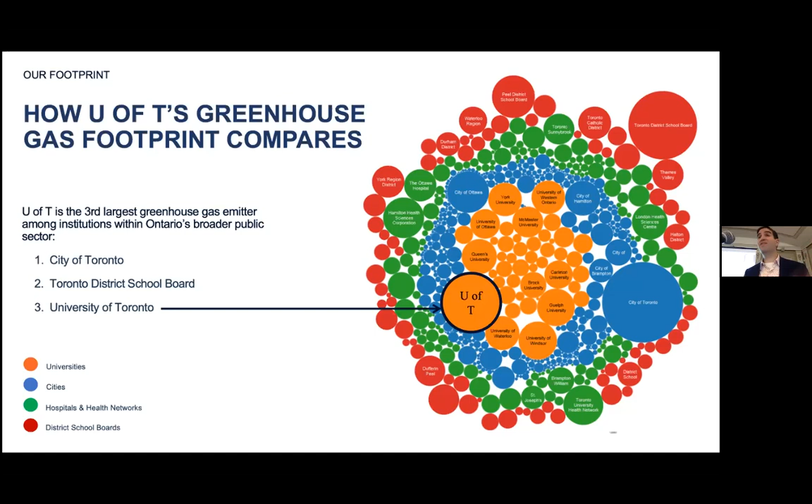I can tell you we have thousands of them across our campus. So that drives our carbon emissions up. And even when you start to compare us to the private sector, in fact, we have more carbon emissions, and this is going back to 2019 before we launched our strategies, than Pearson Airport, more carbon emission than automotive manufacturing.

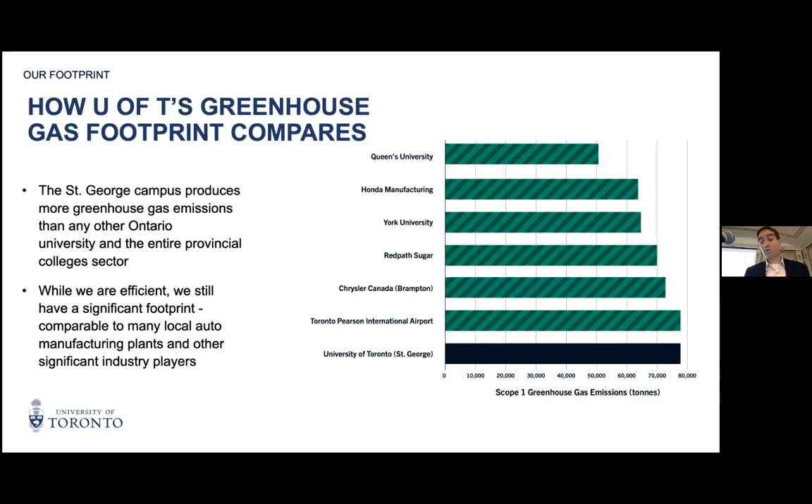So when you think of higher education, you don't really think of carbon emissions or anything of that nature, but there is a reality that we have that, and we have similar problems to these other industries. And for us, especially for myself and my colleague Mark that I'll introduce later, this is a call to action for us and an understanding that this is a problem that we need to tackle and one that we're committed to as an institution.

So that led us to release the low carbon action plan initially, and it's sort of based on this framework that still holds true today. And it's the reality that we produce energy, we distribute energy, and then ultimately we consume energy. And we sort of thought of the process this way and challenged ourselves to say, well, how do we produce as clean as possible? And where we can't, can we do things around carbon capture?

Then once we produce that energy, and in fact, we produce it just 3 doors down at our central utility plant, how do we distribute it to the over 200 buildings that we have on campus and do that distribution as efficiently as possible? Anything you lose in that process is just pure waste. And then lastly, although one would argue most importantly, how do you actually reduce the consumption itself?

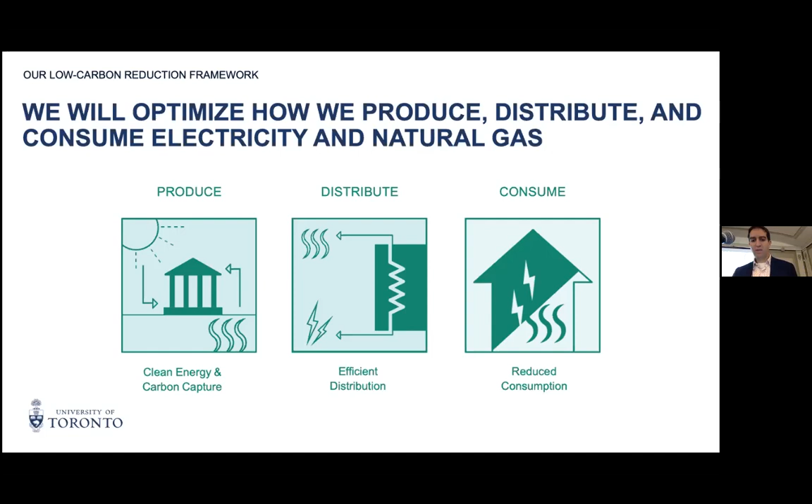And with this framework in mind, we came up with 4 different principles. And the first principle is a reduction first principle, and it's just quite simply, the cleanest and cheapest energy is the one that we don't consume. So how do we reduce our consumption on campus and hence then take that all the way up that sort of framework or value chain I presented to reduce our emissions on the production side?

Secondly, is this idea of balancing carbon versus cost. And I'll dive into this in a bit more detail, but just to kick it off, there's a realization that in Ontario, and this is data from the last 12 months, electricity is about 5 times cleaner than natural gas on an equivalent energy basis. And you can kind of see the carbon intensity per equivalent kilowatt hour for electricity and natural gas. But that same unit of energy is about 10 times more expensive in electricity than natural gas.

You have this reverse incentive. Electricity is 5 times cleaner. And in fact, if we just flip that on its head, we can make an 80% reduction if we electrified everything. At the same time, 10 times more expensive, that would be an impact to the institution of over $180 million a year. Not financially achievable.

So we end up with this challenge of how do you balance these two things? And I don't position this as an excuse. This isn't a reason why you don't do it. This is just a factor that we need to overcome in the design of our solutions.

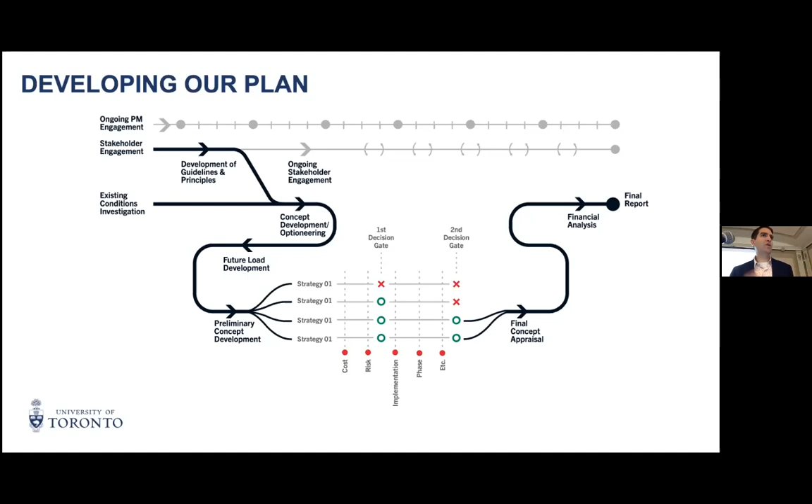And in essence, we start off with figuring out those principles and then starting to look at what are our existing conditions? We have a massive infrastructure system. I'll show you some photos in a moment. And we started to then say, based on that, what concepts can we develop to get to this climate positive future? And then we started to look at what are future loads, meaning as we build new buildings, we'll need more energy. So how do we then also not just meet our current needs, but meet those future needs? And we came up with multiple different strategies. And we started running them through different gates to finally get to what we selected.

And so the three front runners that we studied in great detail are one, what we call central generation. It's what we have today, a central plant there in the red on the left. And then that distributes to the 200 buildings. We came up with what we called a nodal generation strategy. So we've got such a massive campus. Does it make sense to do it all in one place, or can we be more efficient if we do it in 4 places? Or do we just abandon the idea of district energy? Does it make sense in the future to just have every building stand on its own?

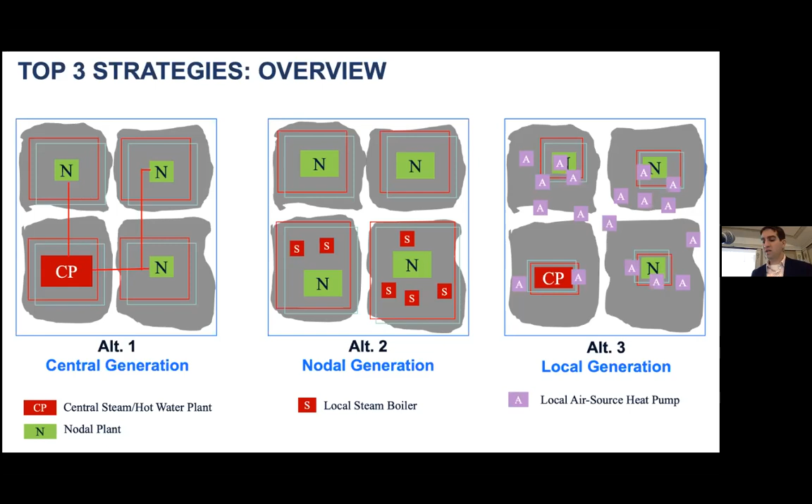Now, we used a multi-factor evaluation matrix for this. We looked at the environmental impacts, primarily focused on carbon in this case, but also looking at implementation and aspects of the environmental impact, digging up roads, things of that nature. Resiliency was a key component for us. And you'll hear me talk about this in a bit more detail in the coming slides, but with the climate change that we're experiencing, we recognize that that's likely to lead to more adverse climate events. So what components of our infrastructure do we need to increase resiliency so that we can maintain the operations, or at the very least maintain the critical components of our operations? People who live on our campus, the research that needs that energy to be constant, and so on.

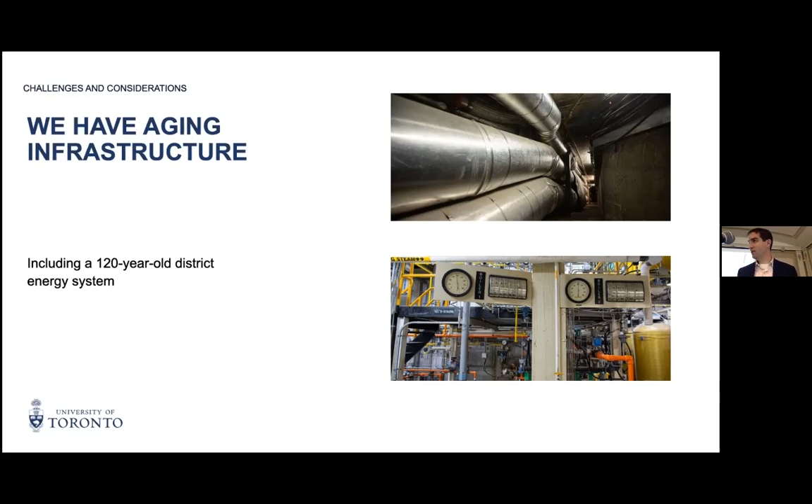So at the end of the day, it boils down to these three goals. First of which is the responsible management of our growth. And we've got tactics underneath each one of these I'll share with you. Second of which is renewing our aged utility infrastructure. Thank you. And the last is a concept around making sure that we have a resilient strategy.

So on the growth, what we did, I want to say 2 summers ago, is we implemented a policy of the institution where we now have an energy and a carbon budget per project. So when a project goes through our governance for approval, they get approval financially. There's also an approval for how much energy they're allowed to use as a firm cap and how much carbon they're allowed to generate as a firm cap. That helps us from a carbon accounting perspective.

So now we can project forward what buildings are coming, how much energy they're going to use. That helps our utilities folks to make sure we have power there, and how much carbon they're going to consume. And that helps us make sure that graph is correct. And that's a firm cap, and every project that's been approved since that policy came in has met that. And so now when we say things are on budget, that means they're on budget financially, but also on budget from a carbon perspective. Our intent is to also extend our district energy system to all of our buildings.

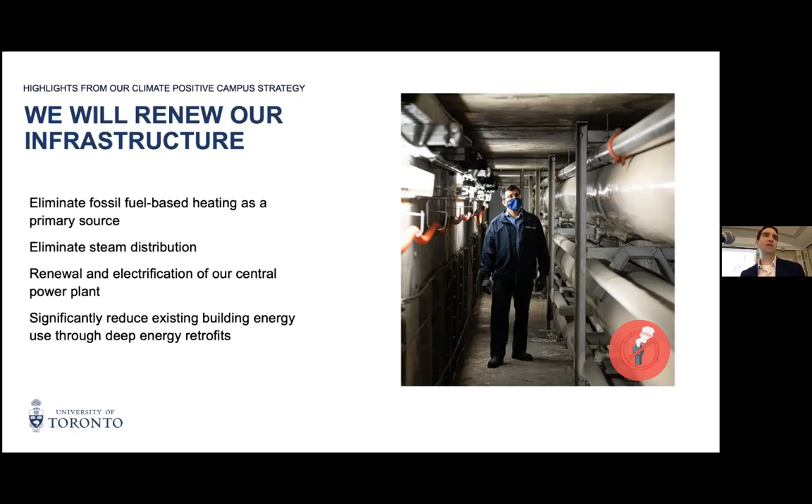We're going to double the size of campus. I can double the central utility plant. That obviously has knock-on impacts to our carbon. Or we can reduce demand in all of our existing buildings and use that capacity to service our new buildings. And that's how we can do an absolute plan where we don't necessarily need to double our carbon emissions as a result. So that last point is just a more succinct way of saying that we're going to do deep energy retrofits to reduce that demand so we can then take that excess capacity it generates to support new buildings.

And the last concept here has to do with resiliency. I always like to illustrate this example because I'm talking about eliminating fossil fuels, and where we are in the city, that means electrification. So we're going to put in electric heating sources. You can also imagine in the downtown core, where Toronto Hydro has probably its oldest assets, we experience quite a few blackouts. And so my nightmare situation is February on a Saturday at 2 a.m., because it always happens Saturday at 2 a.m. We have a blackout, and we're relying on that electricity to heat the buildings that are servicing our research, our students and residents, Vivarium, CL3 labs, all these critical assets. In that situation, the outcomes can be quite disastrous.

So we're working with Toronto Hydro to actually diversify the electrical feeds that are coming in. Today, we have one feed that does 80% of our campus. Our plan looks to bring in 3 feeds from 3 different substations. And we're so fortunate that we are in a part of the city where if you just go 1 block east, it's a different feed from Hydro One, what used to be Ontario Hydro, that comes in from the east of the city. And the other feed comes in from the west. So we are diversifying that electrical input, not just at the Toronto Hydro level, but at the Hydro One level.

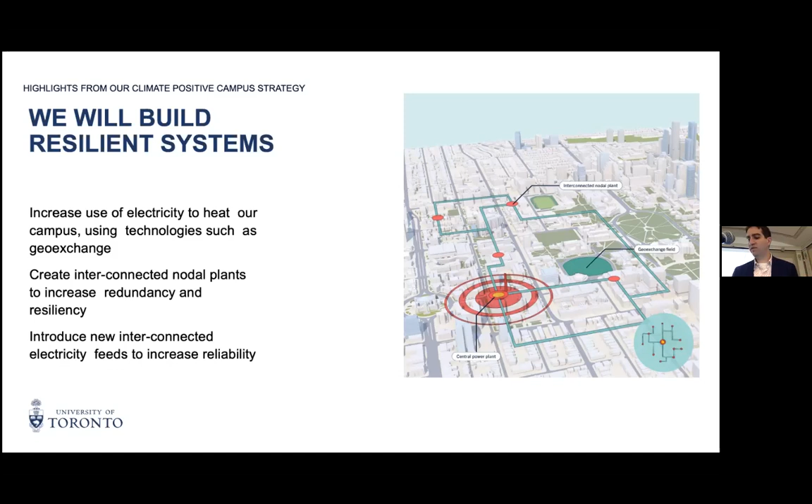So this is where I pause and talk about King's College Circle, because I think King's College Circle and what's happening there exemplifies all of these goals. So it's a big mud pit. What's happening below the mud pit is that we put in 372 wells. See, 374. I always get the 4 and the 2 confused. And I'm over 370. That's why I always write over. Can't be wrong. They're about 250 meters deep.

I always like to liken it there to. Oh, you can't see that. How do I get rid of this pop-up?

It's about a half a CN tower below ground. I always emphasize that these are closed loop systems. We're not pulling water from the ground, and we're not putting water in the ground. It is a closed loop system that in essence uses the bedrock as a thermal battery. So we take the excess heat we have in the summer, it's in essence our air conditioning systems. Instead of rejecting that heat to the atmosphere, we pull that and we put it in these closed loop systems.

The water goes down warm, the bedrock cools it. What it's actually doing is absorbing that heat in the rock. Comes up cold, we can use that to cool our buildings. And then we flip the cycle in the winter. So we put the cold water down and it takes the heat back out of that rock. So imagine a battery, but we're storing heat instead of storing electricity. That's how that system works.

But what's really unique about this is that we're doing this in the heart of our historic core. So for us, this is a demonstration project, not just for the institution. In fact, we've shown this to the city. I've been to the mayor's office a few times to talk about the Green Will Challenge, also share this with other landlords and institutional property owners across the country, because we believe if we can do this in the oldest part of the university, that you can do this to any building.

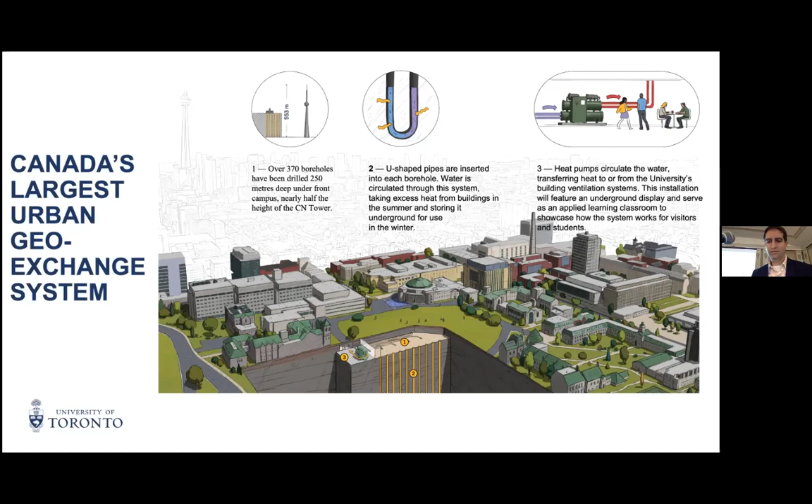We have the Koffler Scientific Reserve, which is up just around the Newmarket, King City space. That area, not only is it a huge land holding, it's grass and certain sections are underutilized, it also creates a lab. We have a lot of faculty members that are studying renewable energy. They would love for us to have this type of asset that they can go and do research on.

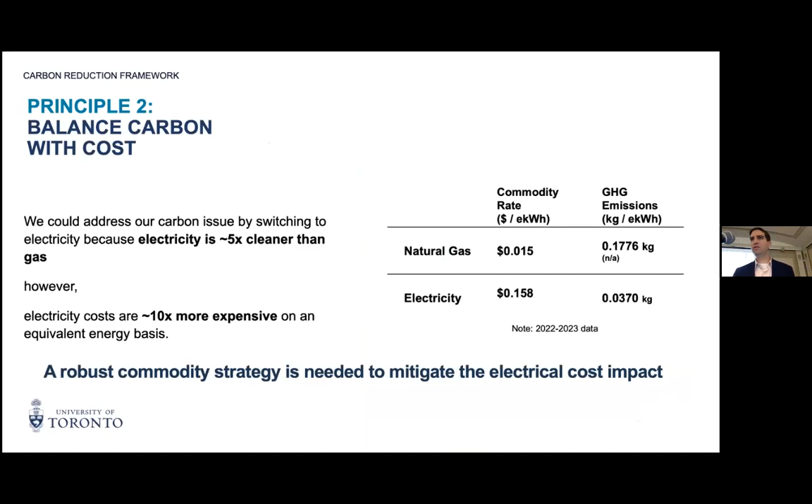So making electrification work. I promised I would talk about this. This is, let's say, that intersection between engineering and finance. How do you reconcile the fact that it's 5 times cleaner, 10 times more expensive? And to do that, I'm going to do a small deep dive into electricity markets in Ontario. Just 2 slides. Hopefully I do a good job at breaking it down. Oops, I thought another slide was coming up next.

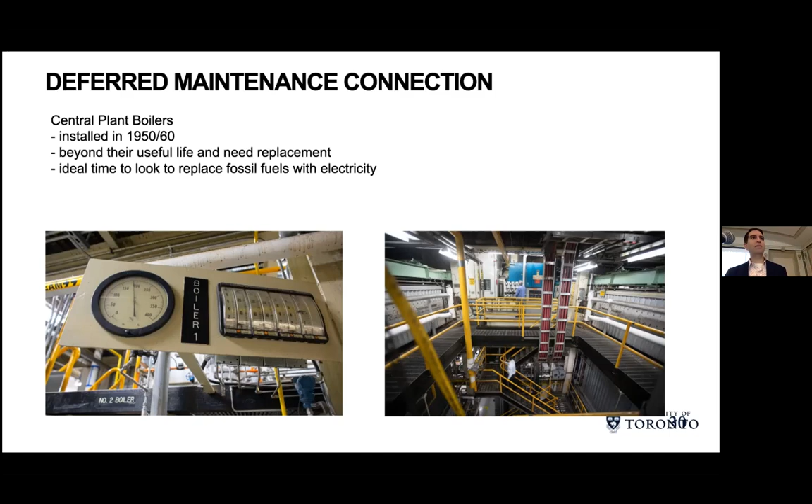And they were all of our boilers. We have 4 of them. They were installed in the 1950s and 1960s. So they're well beyond useful life. And we need to do something from a deferred maintenance perspective. We need to replace these boilers. So this is the time for us to make a decision. Do we put in a natural gas boiler that'll last another 30 years, or do we figure out how to balance carbon with cost and take action now? And that's our intent.

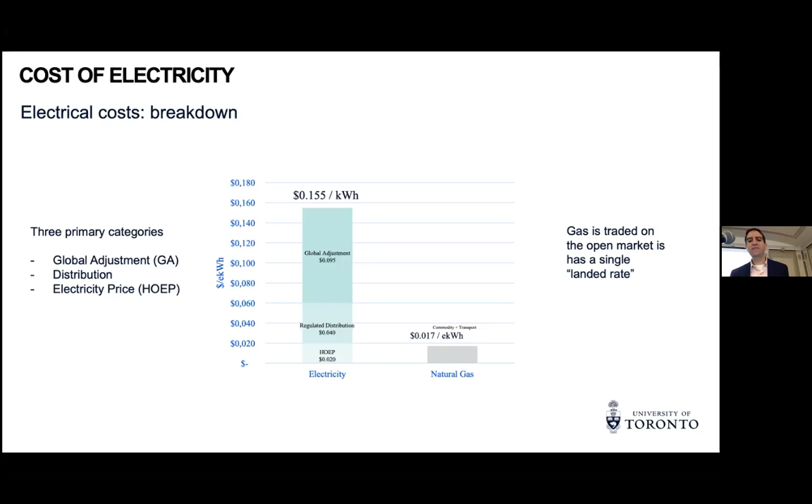Then there's regulated distribution charges. And then lastly, there's something that we call HOEP, but don't be too optimistic. It stands for the Hourly Ontario Electricity Price. It's not often full of hope. In fact, it's going up and down on a daily basis. Those are the components of electricity. Natural gas, it's an open market, it's commodity traded. We have hedging strategies, a very traditional sort of market. And you can see the difference here in those 2 pieces.

But there's 2 ways that you can buy electricity in Ontario, in the industrial markets. And it really has to do with that top section, not the HOEP that is pseudo market traded, but the rest of it. You can purchase it either based on your peak demand, or you can purchase it on your total consumption. And if you look at it from a peak demand perspective, that is, what is the most that you use in that peak day? They take that peak and they figure out this regulatory charge and global adjustment charge.

And how much you consume the rest of the year is not relevant to them. The alternative is they look at everything that you consume and they calculate your costs in that way. And I think here's the graph I was looking at. So this is our profile on a daily basis for our campus. We peak in the summer because of air conditioning. We use a lot of electricity because of air conditioning.

So you could see that if we look at it from a demand perspective, that is the highest point there, usually happens July, August. It's sort of like the what's my peak versus the consumption is the area under the curve. So if we focus strictly on the peak, and if you keep your peak the same, I'll go back one slide, everything that I pointed out there in those brackets becomes a fixed cost. Your incremental consumption is only that little piece.

That's 2 cents compared to natural gas at 1.7 cents. So it's near parity. So if we can keep our peak fixed, we can actually buy electricity at almost the same price of gas. What that means is that this whole thing hatched in red is opportunity for us to use electricity to heat the buildings without changing our peak.

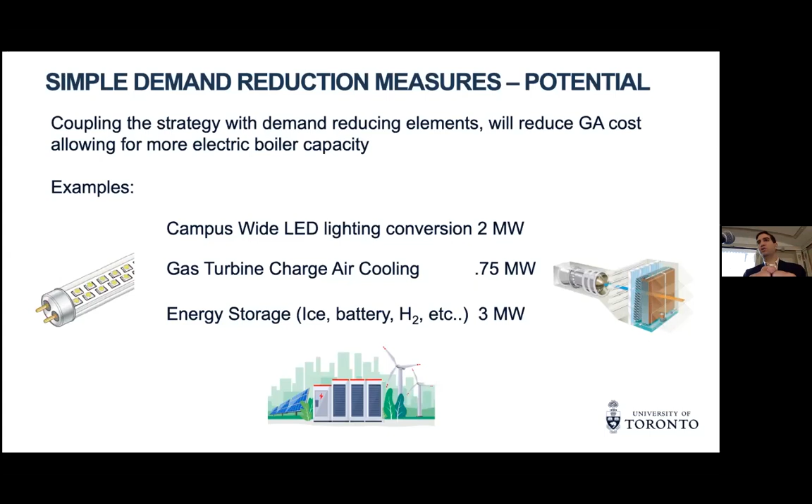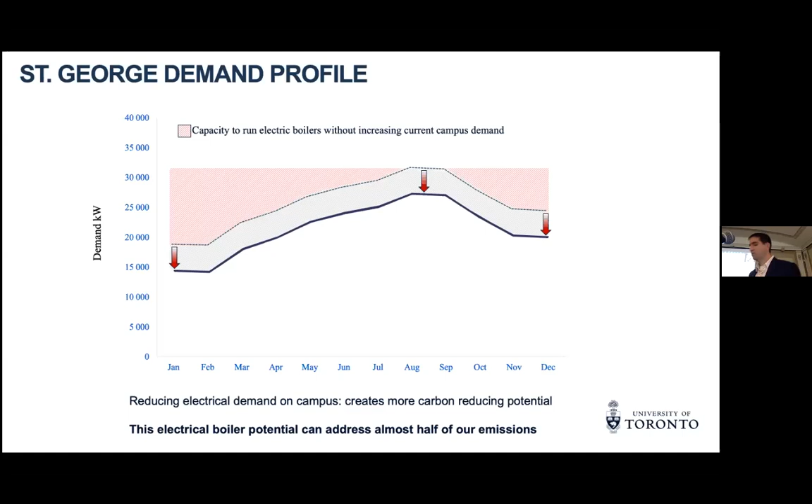And the other thing that we can do is energy storage, where we can fill things like batteries off peak and then discharge them to reduce your peak. And if you did that graphically, you could actually reduce that line and lower it. And if I reduce my peak demand, now all of a sudden I can take all of that red space, all of that gray space, and I can use that to generate heating and cooling and not have to increase our utility bills. And so this is how we've contemplated balancing carbon and cost at our first phase.

And it brings us to our first step in the plan that we call Project Leap. And so this is what I hope will be the mud pile next week that you can see. And this is orders of magnitude different than what we're talking about at King's College Circle. King's College Circle, when that system is up and running, is going to offset about 15,000 tons of carbon a year. Our base on this campus is about 100,000, so easy math, 15%.

What we're talking about with Project Leap is one project that reduces our emissions by over 50%. So just to cut it in half by about 46,000 metric tons, and my math is a bit off there on the 90 and 100, but nonetheless, it starts our transition away from fossil fuels. And ultimately, based on that strategy I just showed, we should be net zero from the utility budget perspective. We're still going to be exposed to market on the HOEP. We'll still be exposed to market pricing on gas, but conceptually, it's the same.

You would argue, hey, carbon tax is doing its job. The university is going to do this project because I can use that $9 million to start to pay the financing for such a project. And lastly, it helps us to mitigate some deferred maintenance risk. That boiler's from 1950. I need to do something.

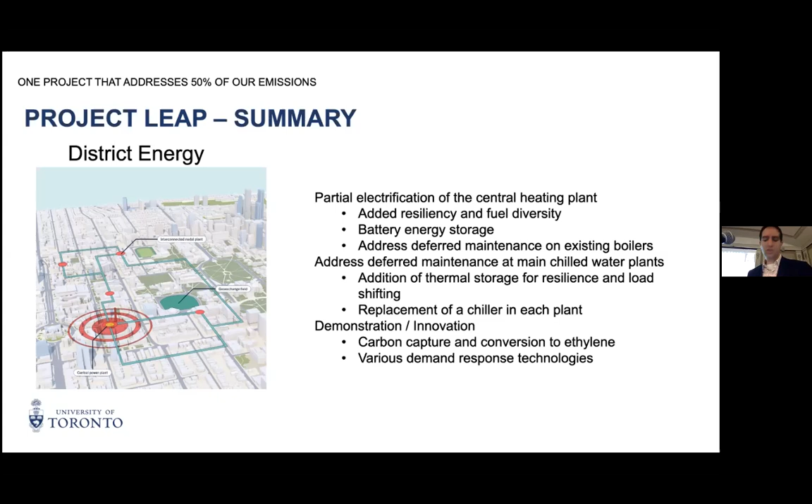One side note that I always like to flag is working with Professor Marianne Touchie to measure not just the economic outcomes and the environmental outcomes of these building retrofits, but how do we also monitor the well-being outcomes of the people in the building? Extreme example, I'll just turn off the energy to the building. I'll have the best, zero carbon, zero utilities, but everyone's wearing parkas all winter long because there's no heating. So how do we make sure we don't do anything that adversely impacts the occupants and their well-being? Those are sort of trade-offs that we're looking to do.

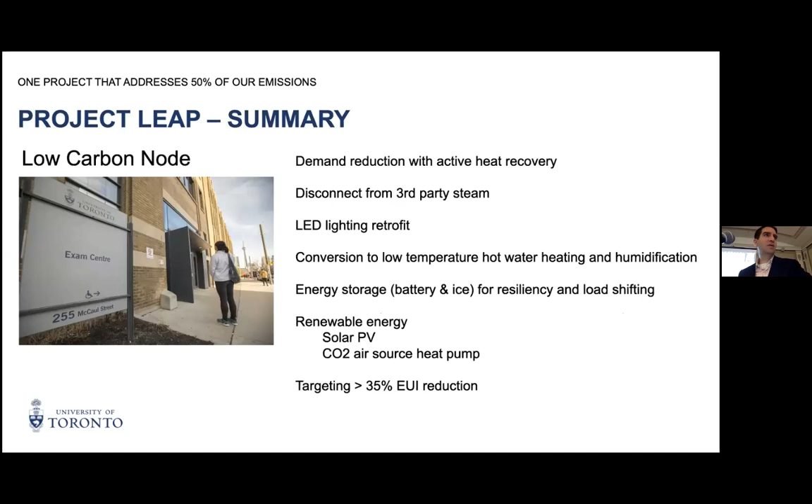Same thing for what we call the low carbon node. The only thing I'd add in this space is that our district energy system doesn't actually go south of College, but we have a lot of buildings south of College. So we currently get energy in these spaces from a third party, Enwave, if you've heard of them, a big private entity that creates steam and so on. And we're looking to exit that and do it ourselves so we could be more accountable and responsible for our emissions versus an entity that is more bottom line focused.

So there is quite a lot of work happening financially. I don't know if I have it in the slide deck, but you may have seen an announcement a few months back that we are partnering with the Canada Infrastructure Bank. They're providing us about $55 million in financing to make this happen. And we're also looking for a slew of grants.

But I think what that does is help us get over the hump of the business case. I think an 8 to 10 year payback in rough terms is a really good target. This project is a little bit beyond that, but some incentives that we've been developing get us into that sweet spot where we're quite confident we can get approval from both our governing council and the other powers that be.

I jumped the gun on this one. So we're quite proud to be partners with CIB. In fact, we're the first public sector partner that they have. And now we're trying to work with them to see how these types of interesting financial models could be shared with other public sector entities, could be universities, hospitals, colleges, to really spur on this type of low carbon economy.

So this is where I said I'm going to turn it over to Mark, and I did that twofold. I know it was sort of a last minute change to the lineup. That's the extent of my sports analogies, but I wanted to emphasize that this type of work doesn't happen with one individual. It happens with a team.

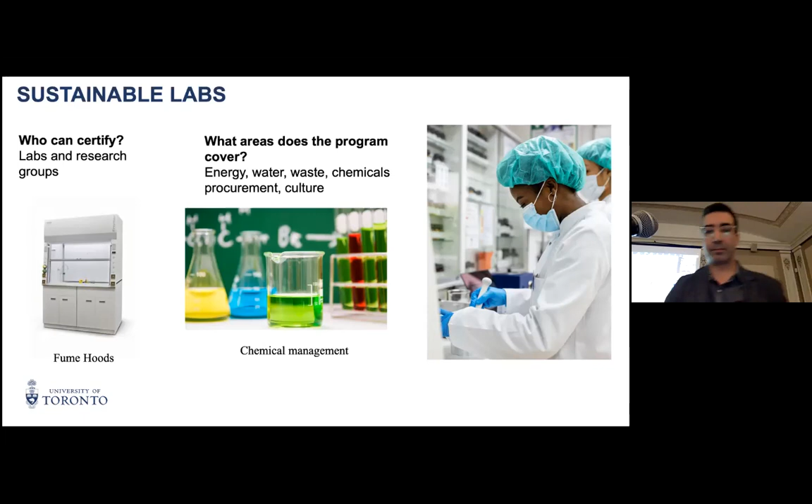If we go over to sustainable residences, this is really about sustainable living. And we host a lot of students and residents on campus. I think this is a great way where we can affect change and create sustainable behaviors with these students as they're incubated, if you will, on our campus before they leave and go hopefully purchase homes. That's become a little bit harder in the GTA, but we're looking for them here to certify their individual room, to do a whole unit, or maybe the dons in residence can certify a whole floor or the whole residence building.